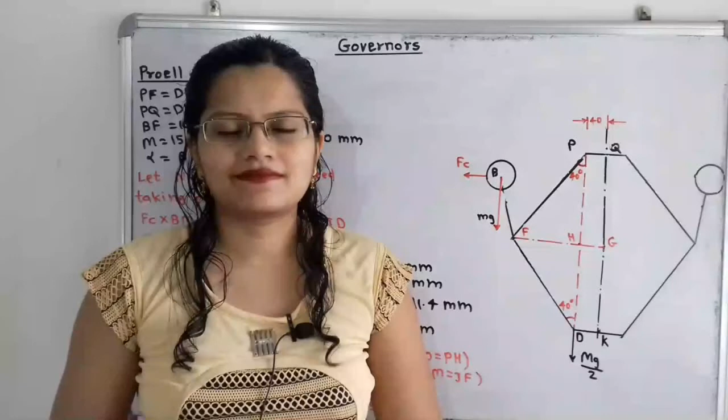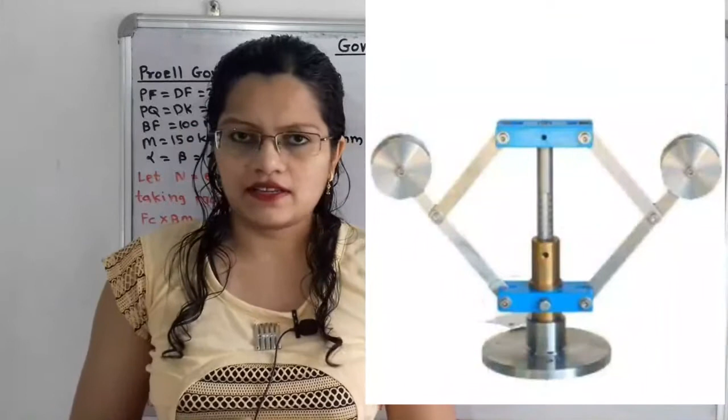Today we are going to solve a problem on Proell governor where the flyballs are rotating with an inclined position with the vertical line. In this video we are going to draw the diagram as per the given data.

Now first I will read what is the given problem. The following particulars refer to a Proell governor with open arms.

Length of the arms is equal to 200 mm. Distance of pivot of arms from the axis of rotation is 40 mm. Length of extension of lower arm to which each ball is attached is 100 mm. Mass of each ball is 6 kg. Mass of central load is 150 kg.

If the radius of rotation of the balls is 180 mm when the arms are inclined at an angle of 40 degrees to the axis of rotation, find the equilibrium speed for the above configuration. So this was the given question.

Let us first understand how to draw the diagram as per given data. If we observe the question, it is given that the length of arms is 200 mm. These arms are pivoted at a distance of 40 mm from the axis of rotation, and the angle made by the arms with the vertical line is equal to 40 degrees. So these are the basic lines we have to consider while drawing the diagram.

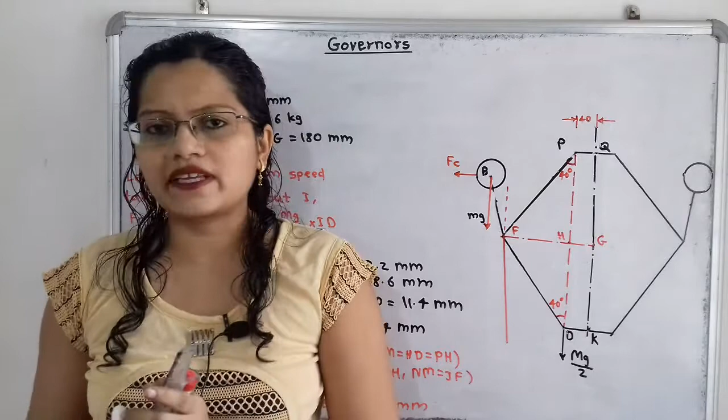So we have to first draw the spindle axis, known as the axis of rotation, in the form of dash and dot. Here is one vertical line in the form of dash and dot which is known as the axis of rotation.

Now we have to take the fixed points, that is the pivoted points, at a distance of 40 mm as per the given data. So we will select one particular point, point Q, on this axis of rotation, and take a horizontal distance of 40 mm. This is point P, the pivoted point of the arm.

Then what is the length of arm given? The length of arm is 200 mm, and this arm is inclined at an angle of 40 degrees. From point P, we again draw one vertical line passing through this point, and at an inclination of 40 degrees we draw this arm PF, which is equal to 200 mm.

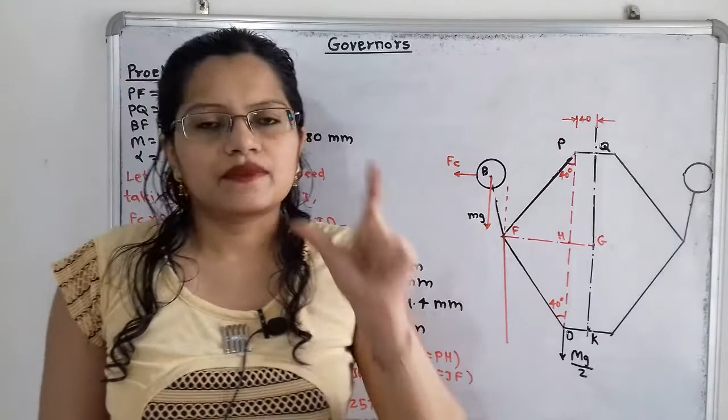Now again at the base point we select one particular point, point K, and here also we have to maintain the distance of 40 mm, and the lower arm is also equal to 200 mm. So from point F we again draw a length of arm equal to 200 mm, ending at point D.

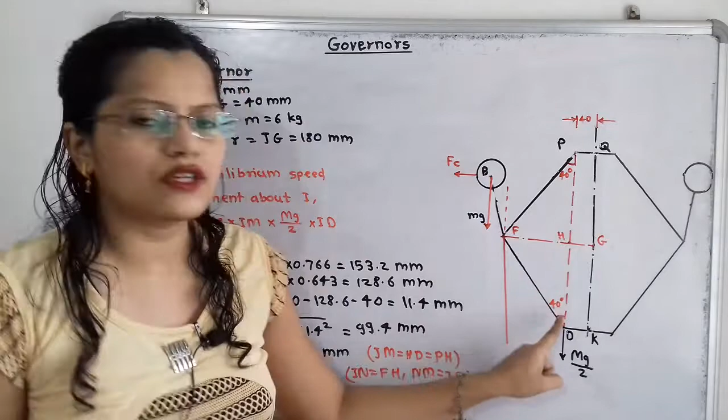So this arm DF, equal to 200 mm, makes an angle with the vertical line also equal to 40 degrees. We can say this is angle alpha and this is angle beta, which is equal to 40 degrees. Then this point D is the pivoted point for the lower arm. So this distance DK, which is equal to PQ, is equal to 40 mm.

Now it is given that the flyballs are rotating with inclination. So the arm of this flyball is nothing but the extension of this lower arm. So here is point F.

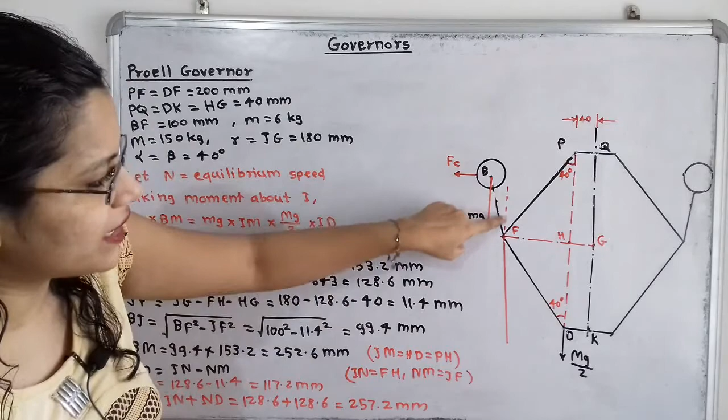We first draw one vertical line in the form of dash passing through point F, and show some inclination. This arm BF is the inclined arm, with a length of 100 mm, where B is the center of the flyball. So here we have to draw this flyball.

Then the mass of the flyball is also mentioned, that is 6 kg. So due to mass there is the weight of the flyball, and we know that weight always acts in the vertically downward direction passing through the center of the flyball. So here I have shown this weight mg acting in the vertically downward direction.

There is the central load, capital M, equal to 150 kg, and the central load is attached to the sleeve, so we have to show that. But in this question we will refer only to the half part of the governor, so we will refer to only the half central weight. What is the weight? Mass is equal to 150 kilogram, weight is equal to m into g, that is capital M into g, and that will act in the vertically downward direction passing through this pivoted point.

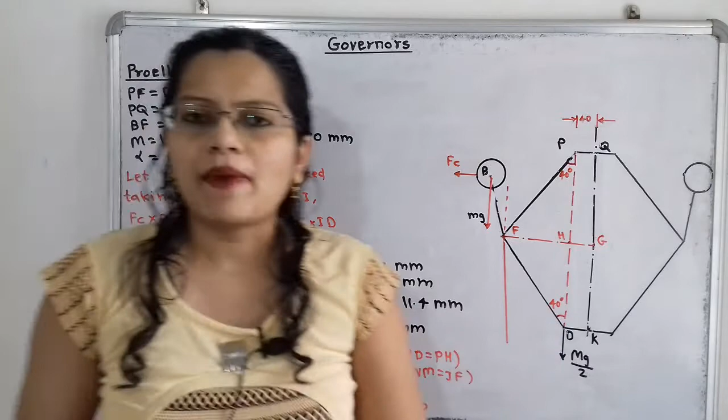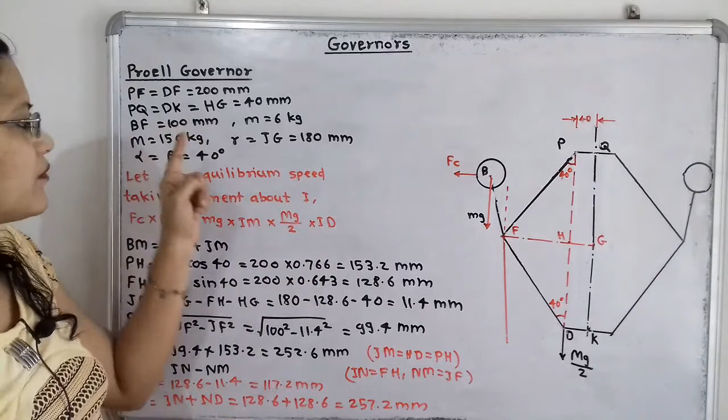That is, we have to show here, this is the point D, we have to show half central load. That is, half load means this total load is 150 into 9.81, but we have to take this capital MG by 2, and we have to show the downward direction passing through this point D.

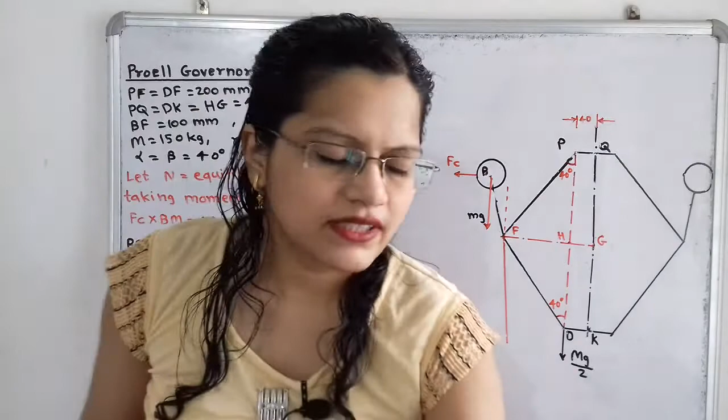Now we have to make some constructions. We will first plot the instantaneous center for this diagram. So how to plot? For that we have to extend this arm PF, in the same inclination.

Here we have to draw one horizontal line passing through this point D. Instead of saying horizontal line, I will say that we have to draw one perpendicular line with the axis of rotation passing through this point D. So this spindle axis is the vertical line. So we have to draw here one horizontal line passing through the point D, and we will get here the instantaneous center, that is I.

So this is the point I. Now if I draw one vertical line passing through this point F, here is the point of intersection on this length DI, so I will say this point will be N.

And again I will extend this weight mg, which will act in vertically downward direction. If I extend this, here is also the point of intersection on this length DI, I will say that this is the point M.

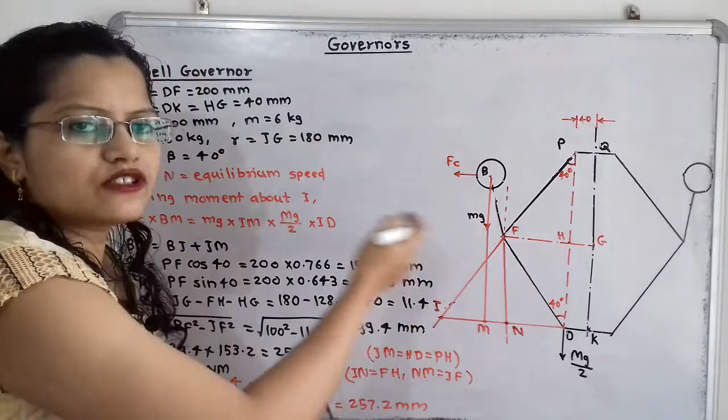And again from this point F I will draw one horizontal line backward, and the point of intersection with this total length BM is nothing but here is the point J.

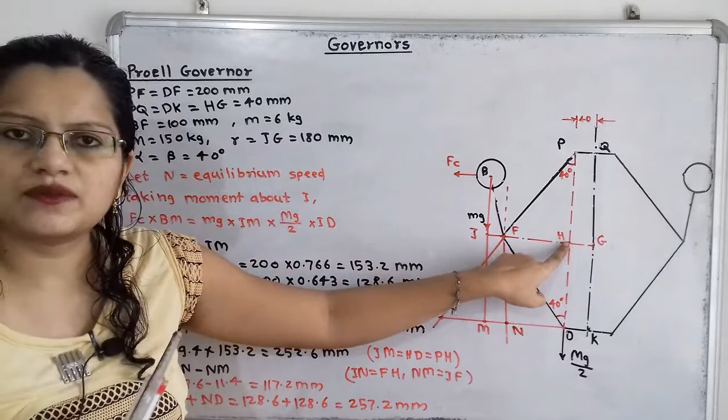Now again we have to make one construction. Passing through this point F we have to draw one horizontal line. Then there is the point of intersection with this line joining these pivoted points PD, so this is point H, and for this horizontal line there is again the point of intersection with this axis of rotation, and this point will be point G.

Now if we observe this diagram, we can say that here this arm PF, which is equal to FD, then these two angles are also same, that is angle made by these two arms with this vertical line are also same. So we can say that here point H will be the middle point of this total vertical length PD.

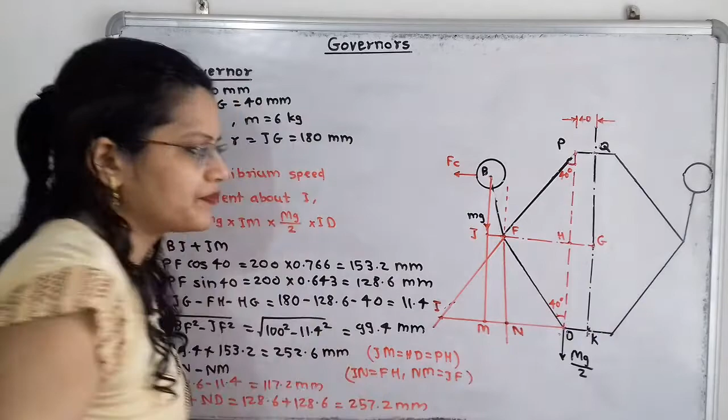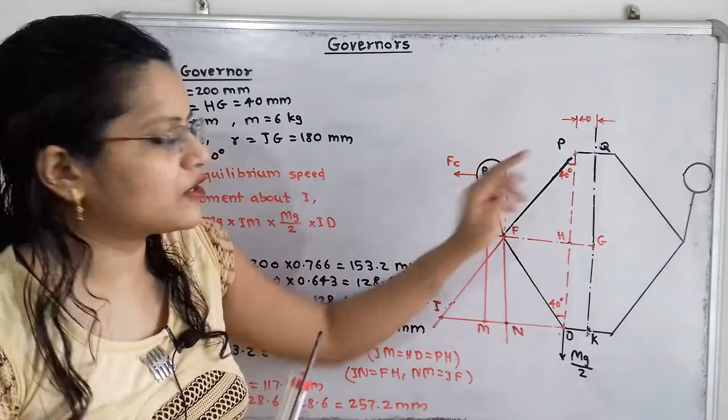In the same way, this point G will also be the midpoint for this total vertical line QK. This is by observation, because as per the given condition, if these two lengths are same and the angle made by these two lines with vertical line are also same, so the line passing through this point F is also the midpoint for this vertical line.

If we observe this system when it is working, then these flyballs are rotating about this vertical spindle axis. Then here the centrifugal force acts, passing through the center of these flyballs in radially outward direction. So we have to show here centrifugal force.

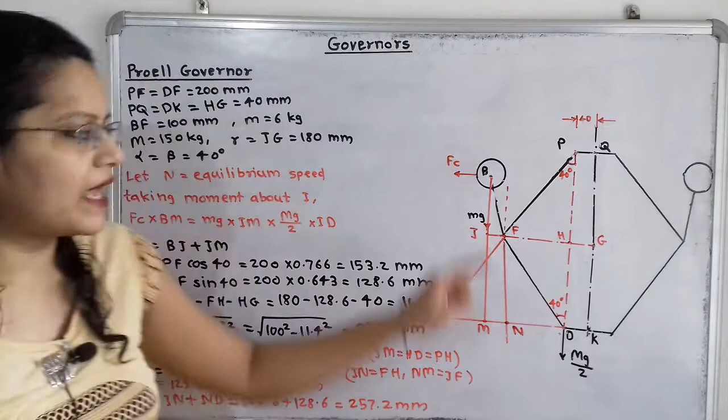At the same time, because of the weight of the flyball, there is the weight mg which will act in vertically downward direction, and due to central load we are going to consider only half portion of the governor. Central load passing through this point D is mg by 2.

Now we have to find out what is the equilibrium speed. So we will consider n is the equilibrium speed that we have to find out.

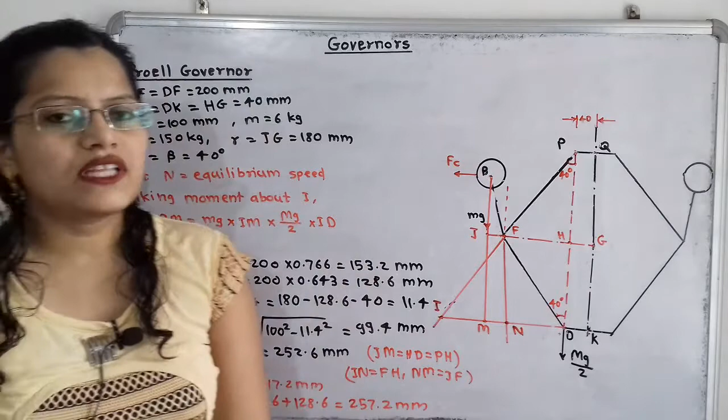Now we will take the moment about the instantaneous center I. So how to take the moment? We know that moment is force multiplied by the perpendicular distance. So with the help of compass we will understand how to take the moment.

Now this is the instantaneous center. Here is the FC that will act in radially outward direction, because here is the axis of rotation. So if I take I as a center and move the compass in the direction of FC, then there is the direction, I will show here, this is the direction. So this direction is the anti-clockwise direction. So we have to take this FC multiplied by perpendicular distance.

So what is the perpendicular distance from this I? That is B to M. So I will say that FC multiplied by BM.

Now next force is due to this weight mg. So again, if I take I as a center and move the compass in the direction of this mg, that is in the downward direction.

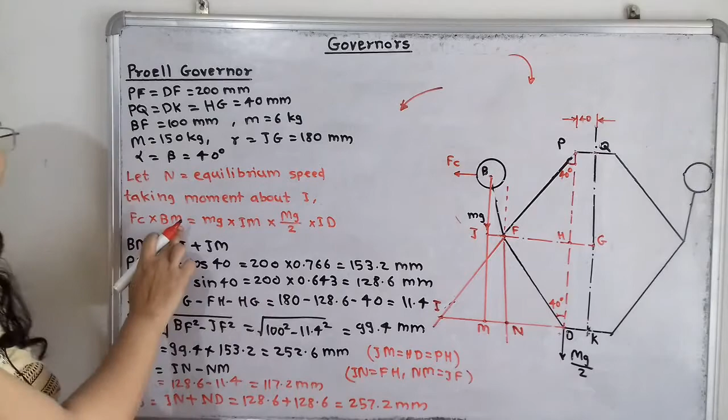So here is the direction, that is in the clockwise direction, opposite to this FC. So I will take this moment on the opposite side of the equation: this FC multiplied by BM is equal to this mg multiplied by perpendicular distance.

So what is the perpendicular distance? That is this IM, then here is the central load. So if I take I as a center and move the compass in the direction of this mg by 2, then again there is the same direction, that is clockwise direction. So on the same side of this mg I will add this.

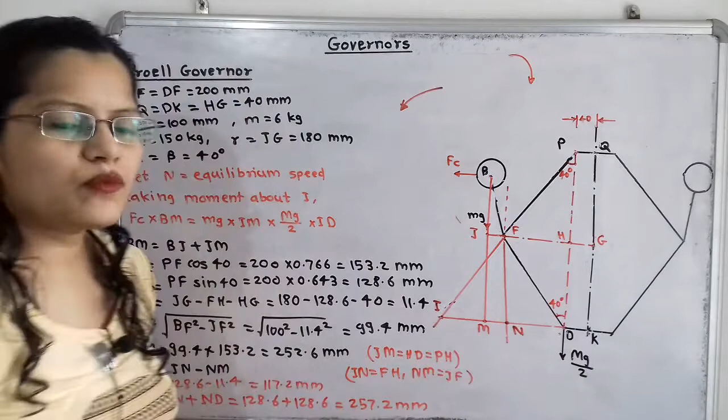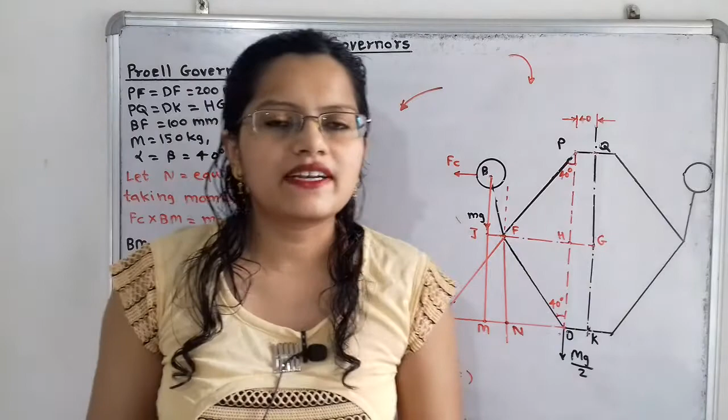So how to take the moment? That is this mg by 2 multiplied by perpendicular distance, that is ID. So here plus mg by 2 into ID. So this is the equation when we take the moment about I, and this is the moment we are taking considering the equilibrium of the system.

And when we solve this equation, then we will get what is the equilibrium speed n. So before that we have to first find out what is the distance B to M, then what is distance I to M, and what is the distance I to D. So how to find out?

So we know that if we observe this diagram, BM is equal to this BJ plus JM. So we will first find out what is this distance JM. So we know that this point G is the central point. So we can say that this QG, which is equal to GK, or we can also say that this PH, which is equal to HD.

Now this HD, which is equal to JM. So for this value of JM, we will first find out what is the distance of PH. So from this triangle PFH, we can find out the distance PH, because this length PF is known and this angle is also known. So PH is equal to PF cos of 40.

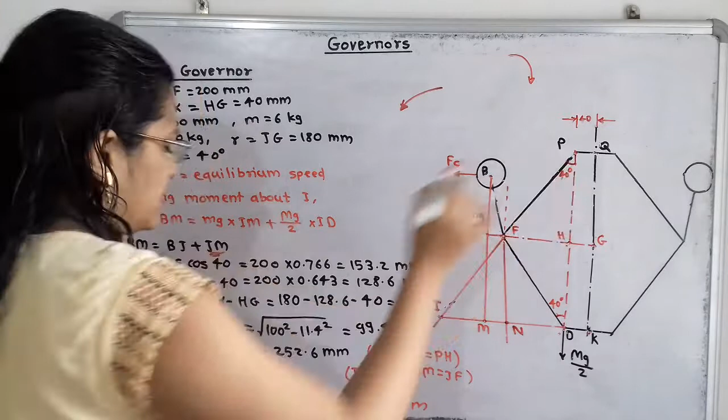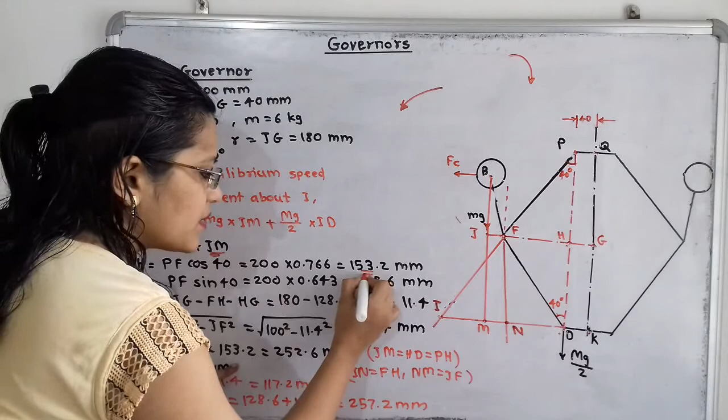So when we solve this, that is 200 into 0.766, we will get 153.2 millimeter. So we can say that this 153.2 millimeter, this distance PH, which is equal to HD and which is equal to JM. So this JM, that is equal to 153.2.

Then we will find out FH. So what is this distance FH? So again we will consider this triangle PFH. So here this side is opposite to angle 40 degrees. So we can say that PF sine of 40. So PF is 200 into 0.643, that is 128.6 millimeter.

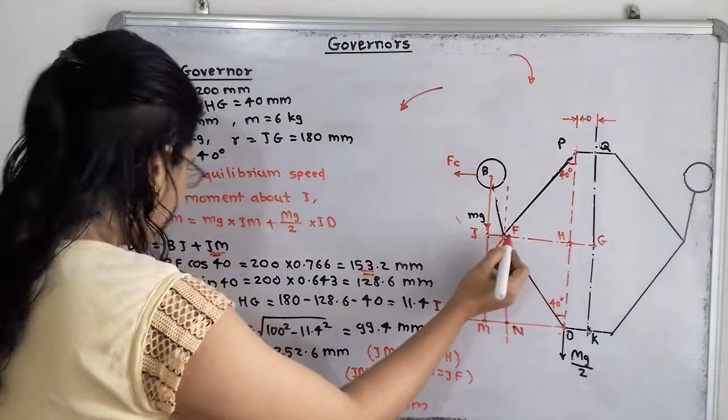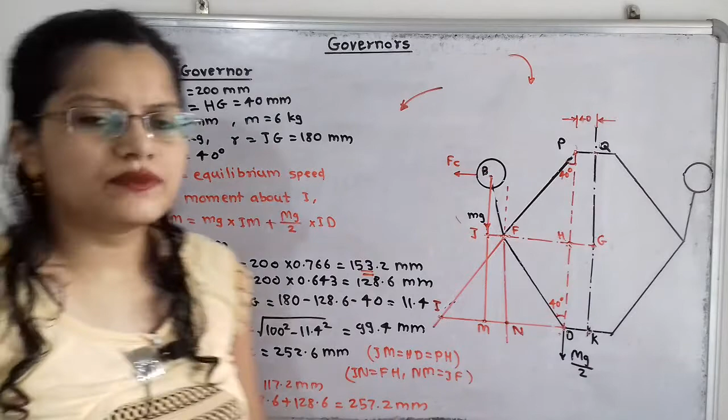So this is the distance of FH. Then what is the distance JF? So if we observe here, JF is equal to this total distance J to G minus this distance FH and minus HG. So if we observe the question, it is given that the radius of rotation of the fly ball, that is equal to 180 millimeter.

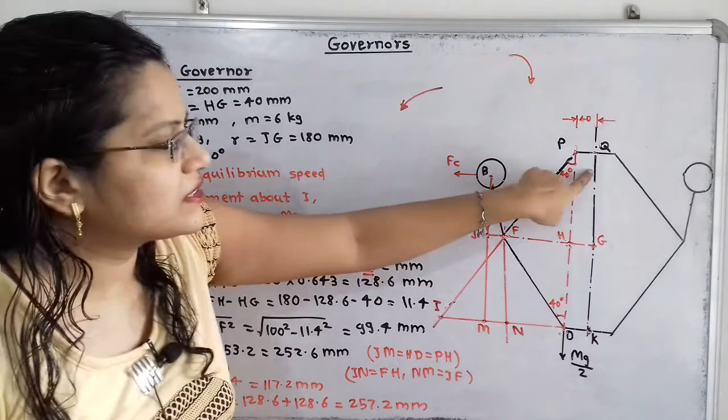So radius of rotation of fly ball means the distance from the center of this fly ball to the axis of rotation is equal to 180 millimeter, and that is mentioned here. So this R is nothing but distance from J to G. So I will show here in the diagram.

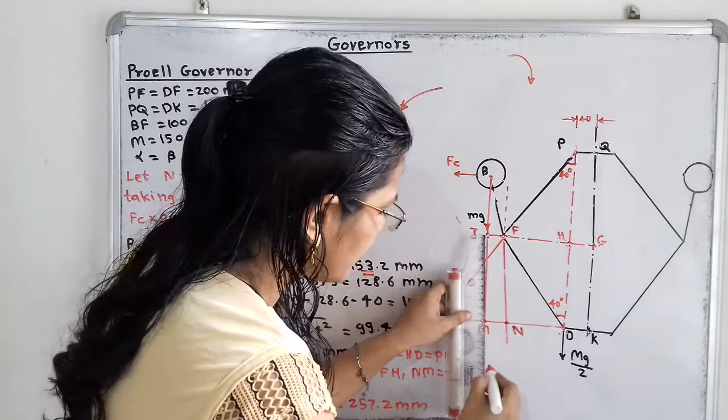So this horizontal distance we have to mention. So this is important. What is the meaning of radius of rotation? That means distance from center of fly ball to this axis of rotation. Now we have to find out JF. So how to find out this JF? So JF is equal to this total distance JG minus FH minus HG.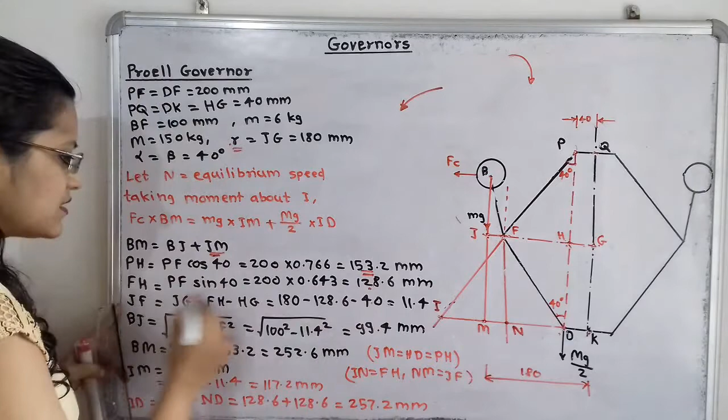So FH that we have calculated here, that is 128.6, so we will take here. So JF is nothing but 180 minus 128.6 and minus HG. So this HG is equal to PQ, which is equal to 40. So what is this distance JF? That is 11.4 millimeter. So this JF is equal to 11.4 millimeter.

Now we will move for the next, that is, we will find out what is the distance B to J. So how to find out this distance B to J? So we will refer here the triangle BJF. So for this distance BJ, we will say that this is right angle triangle.

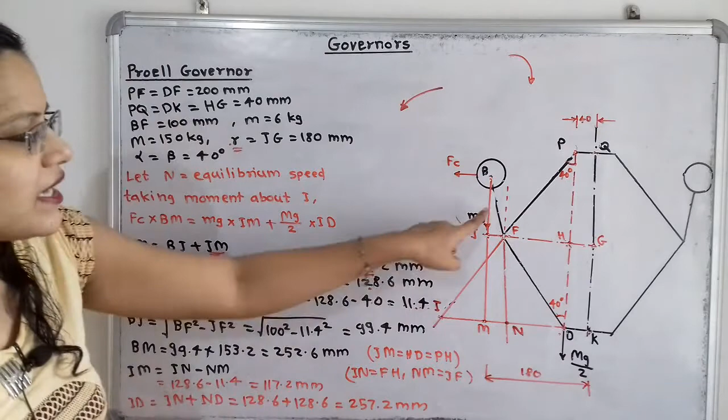So under root of BF square minus JF square, because these are the other two sides. So BF square minus JF square. So BF is nothing but, it is given that 100 millimeter, that is mentioned in the question, and JF we have calculated here 11.4.

So under root of 100 square minus 11.4 square, which is equal to 99.4 millimeter. So in this way, this BJ is getting calculated.

Then this JM is nothing but HD, and it is nothing but PH. So PH is also getting calculated.

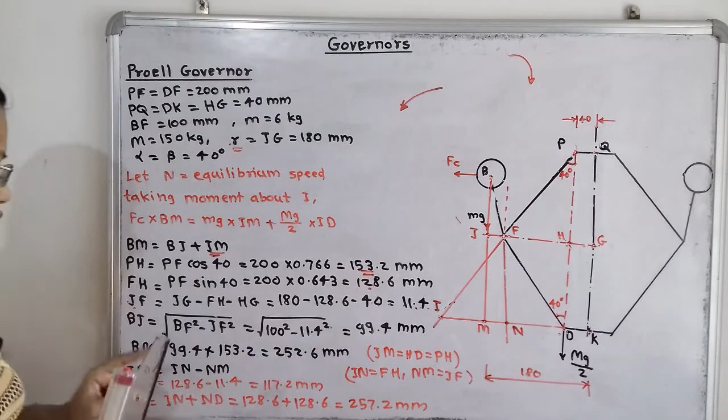So what is the value of BM? That is 99.4 plus 153.2, that is equal to 252.6 millimeter. So this one side, that is this BM, is getting calculated.

Now we will move for calculation of IM. So here is the I to M. How can we define this IM? IM is equal to this IN minus NM. Now if we observe this diagram, this MN is equal to JF. So this JF we can take as it is, as NM.

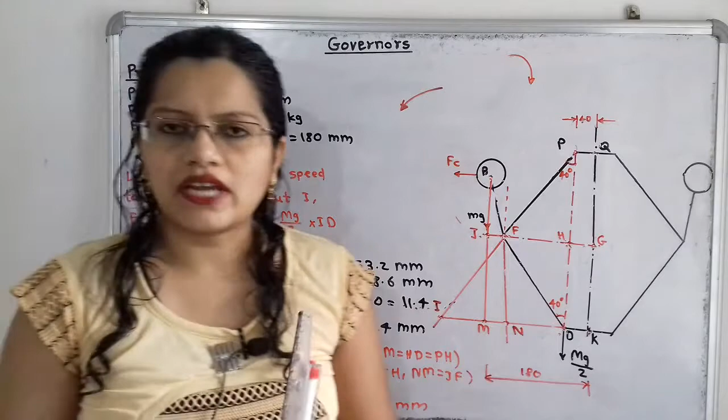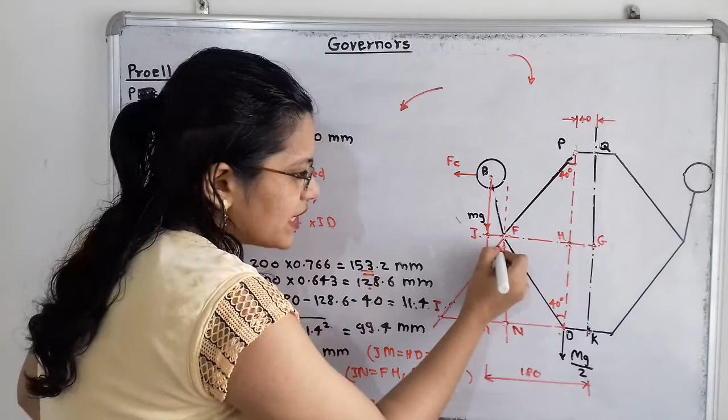And what about this IN? We have to again observe this diagram. Here this PF is getting extended up to point I. The angle made by PF with this vertical line is 40 degree. If I draw one vertical line passing through this point F, because point F is the starting point for this length FI, here is also the same angle, because these two are parallel lines and this is the common line. So I will say that this is the 40 degree.

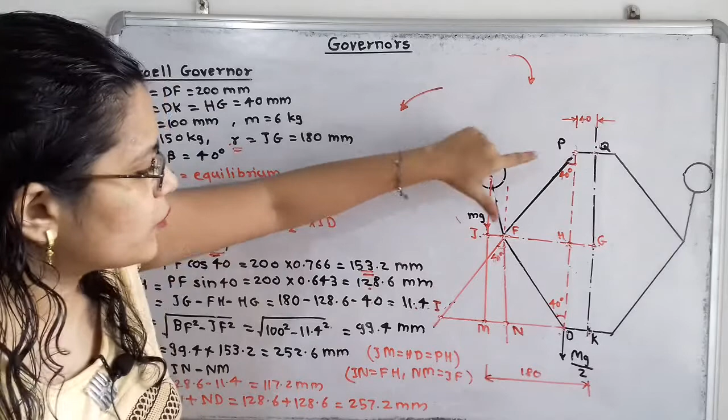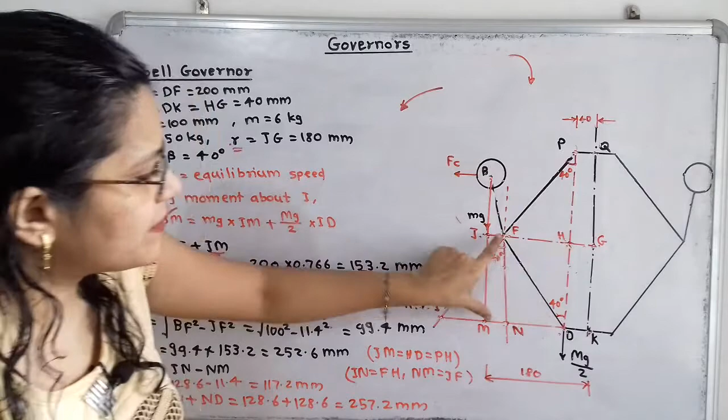Now if we observe here, this is the triangle PFH and here is the triangle FIN. In these two triangles, this side FN is equal to PH, because here H is the middle point. So we know that PH is equal to HD, which is equal to FN, which means these two sides are same. And the angle made by the second side is also same, that is 40 degree. So we can say that IN is nothing but equal to FH.

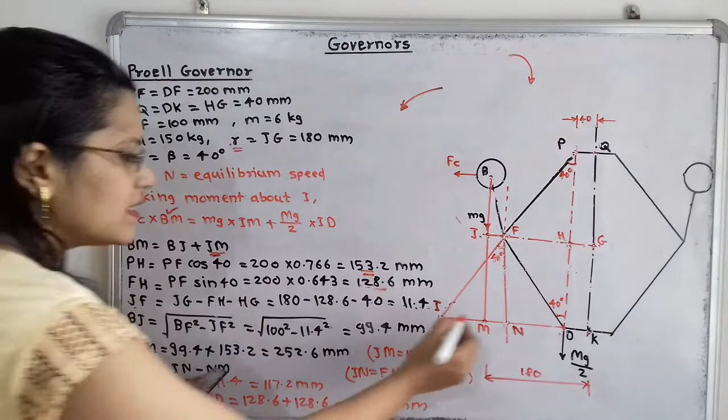And this FH is already getting calculated. Here is FH, that is 128.6, that is getting calculated, and this FH is equal to IN. So we can easily take IN equal to 128.6 minus NM, that is equal to JF, which is equal to 11.4, and which is equal to 117.2 millimeter. So in this way, this second side, that is IM, is also getting calculated.

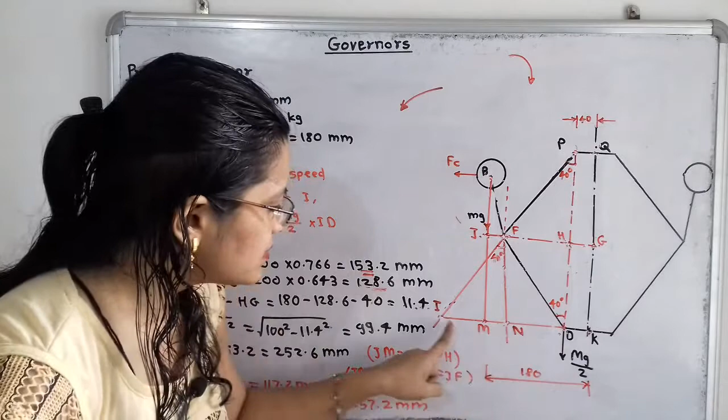Now next is ID, I to D. How to measure this distance I to D? If we observe here, ID is equal to IN plus ND. Now IN is nothing but we have calculated I to N, that is equal to FH, which is equal to 128.6. And this ND, if we observe this diagram, here is the vertical line.

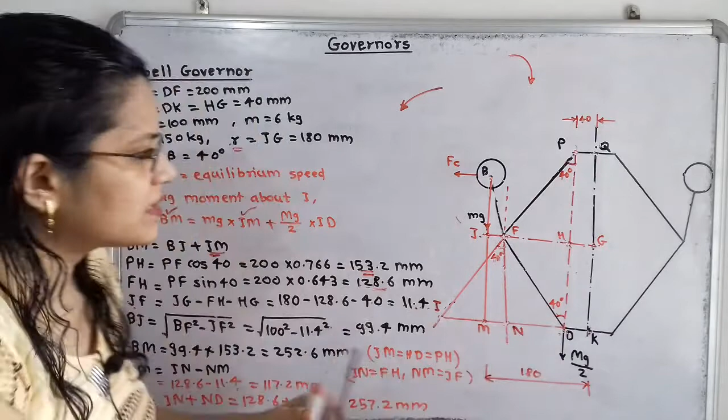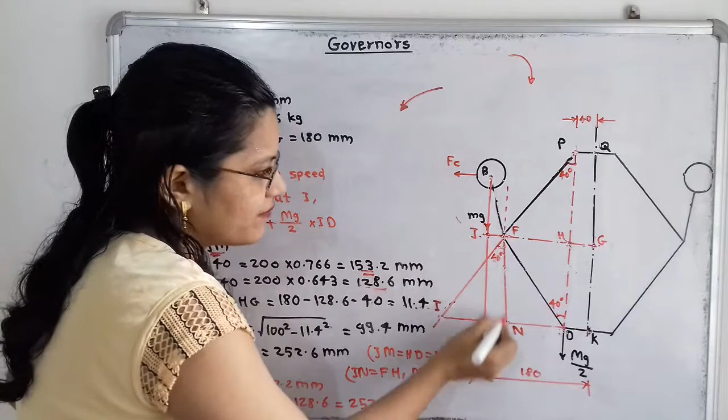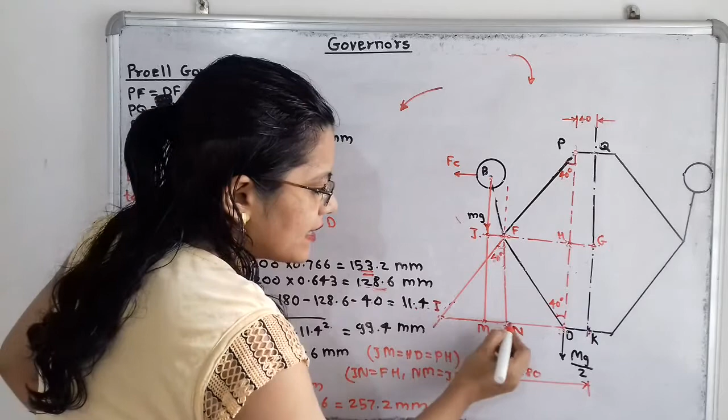So this distance H and D, these are collinear points. Then here is also a vertical line passing through point F, that is F and N are also collinear points. So we can say that this FH is equal to ND. So ND is equal to FH, and IN is equal to FH. So we can say that ID is equal to IN plus ND. So IN is 128.6, ND is also equal to 128.6, which is equal to 257.2 millimeter. So this length is also getting calculated.

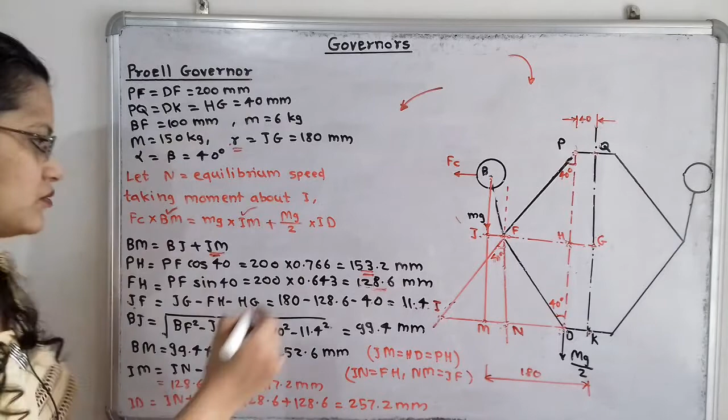Now we will put values in the equation and find out what is the equilibrium speed N. So this FC multiplied by BM, that is 252.6, which is equal to small m, that is 6, multiplied by 9.81 into 117.2, plus capital M, that is 150 into 9.81 by 2 into 257.2. So here Fc is the only unknown term.

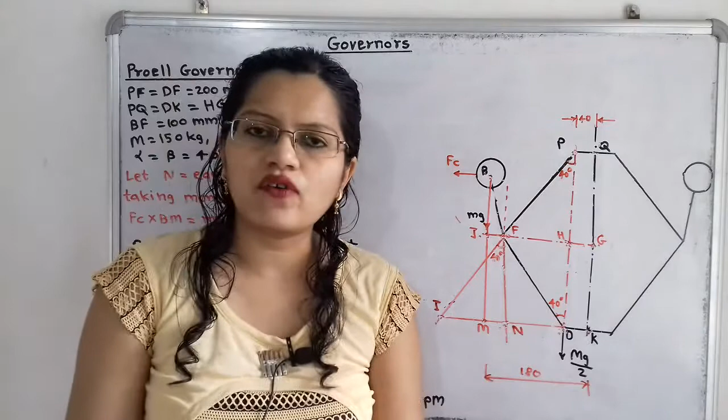So Fc is 776.4 Newton. Now what is this centrifugal force? Centrifugal force is nothing but mr omega square. This centrifugal force is acting through the center of the flyball.

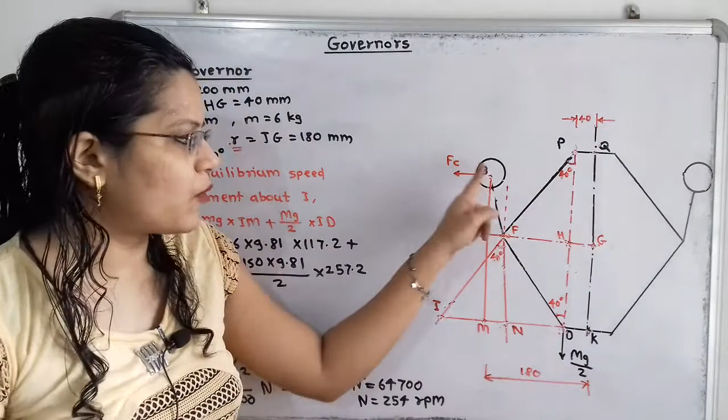So m is mass of the flyball, r is the radius of rotation of flyballs, that is 180 millimeters. We have to take this in meter, that is 0.18 meter, and omega is the angular velocity. We can write this in terms of n, that is omega is equal to 2 pi n by 60. So here omega square is there.

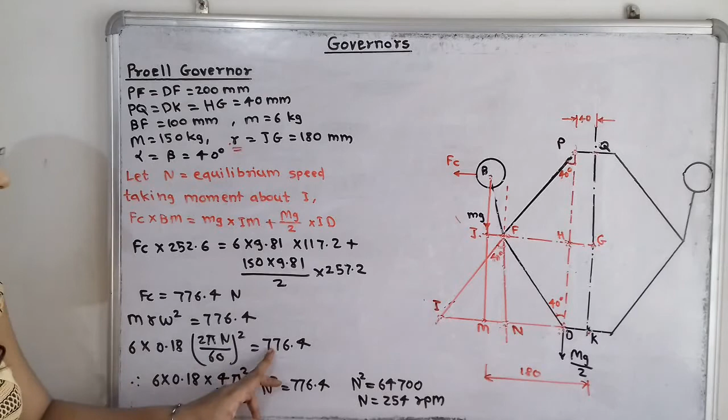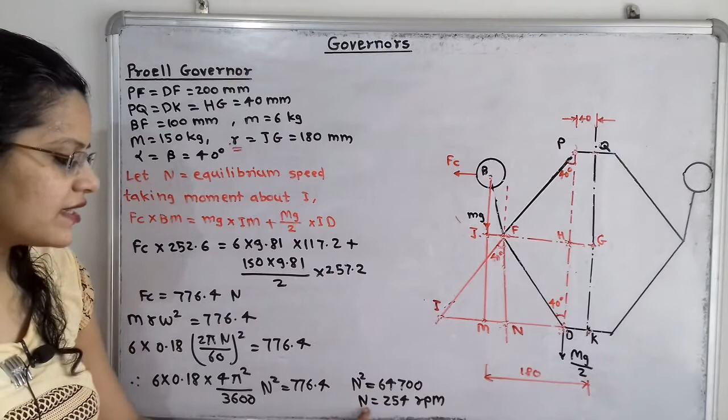So we will refer 2 pi n by 60 bracket square, which is equal to 776.4. Again we will simplify this: 6 into 0.18 into 4 pi square by 3600 into n square, which is equal to 776.4. So n square is equal to 64,700. If we take the square root on both sides, we will get the answer n is equal to 254 rpm, and this is the answer.